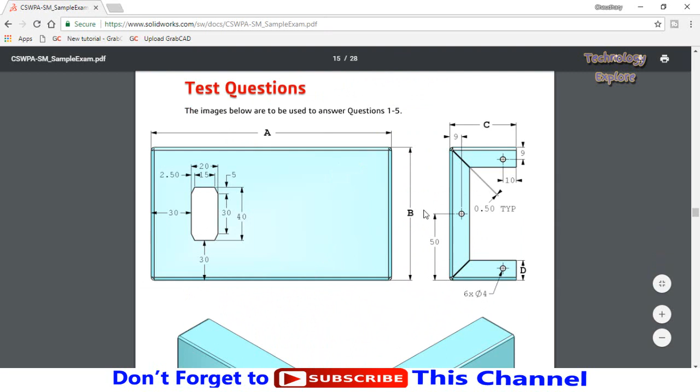Scroll down and directly jump to the test questions. This is the part and we have to draw this part or design this part in SolidWorks by using sheet metal features. As you can see here, A, B, C and D are the dimensions which are given to us as equations.

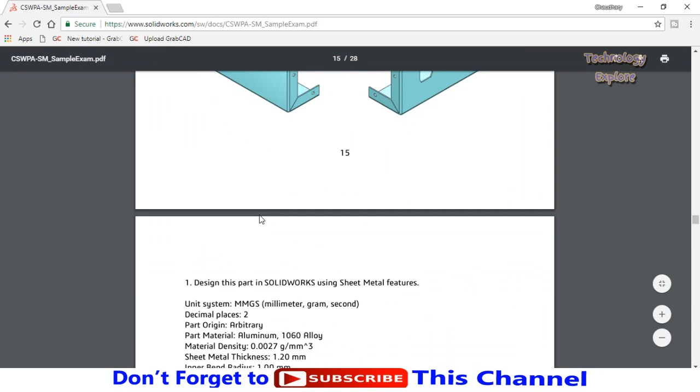Now let's start. Open SolidWorks. First of all, we have to add these equations A, B, C, D in SolidWorks. Go to Tools, then select Equations. Make sure this box, automatically rebuild, is checked. Then click on this box and type A, press enter button.

Now type the value of A equation, 180 millimeter, press enter button. Then click on this box and type B, press enter, and define the value 100 millimeter, press enter button. Similarly, type the values of C and D, 50 millimeter, and D 15 millimeter. Press enter.

Then press OK button. Now we have to start the part. So sketch on front plane, then draw a rectangle and start it from origin. Now define it, define this length.

We have to link this dimension with A. For that you must type is equal to sign and then press A button. Now link it with A, press OK. So as you can see here, we have the equation sign in our dimension.

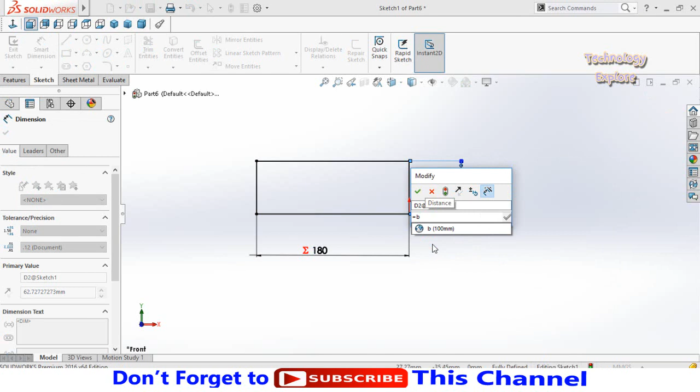Then define this dimension and link it with B, and press OK button.

Now go to sheet metal tab and select base flange tab, then type here 1.2 millimeter sheet metal thickness as given in the conditions. Press OK button.

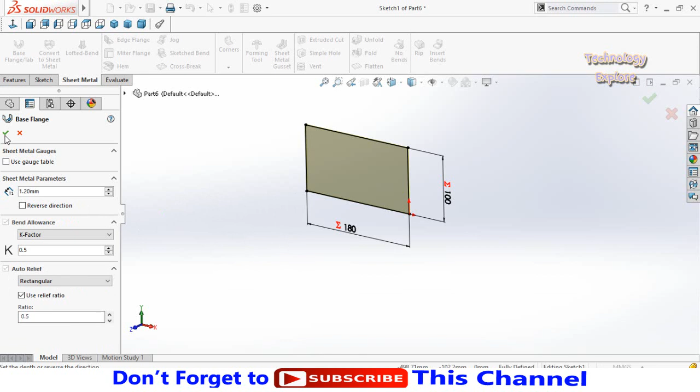Next step is to click on edge flange command here, then select this edge in this direction. Also select this edge. Now we have to edit these dimensions according to our conditions.

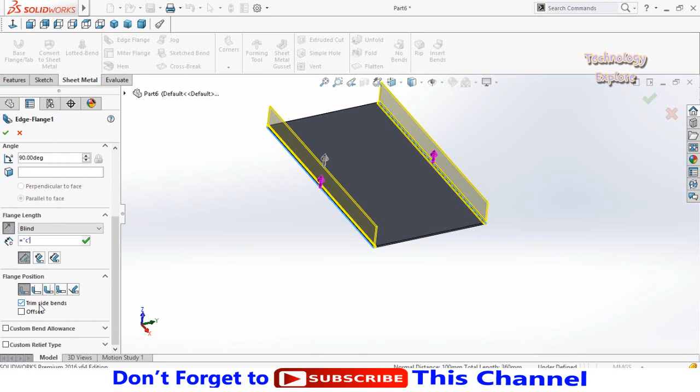Uncheck this box. We had inner bend radius 1 millimeter. Scroll down, then link this dimension with C. Press is equal to sign and then type C, link it with C, and make sure these settings are according to the conditions. Then check this box, trim side bends, and press OK button.

Now again select edge flange command and select this edge in this direction. Also select this edge, and from here select these three edges.

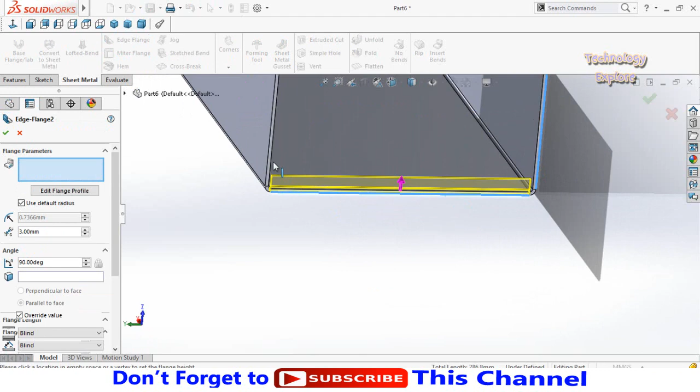Now edit these dimensions according to conditions. Inner bend radius is 1 millimeter. This gap distance is 0.5 millimeter. Scroll down and link this dimension with D. Press OK button.

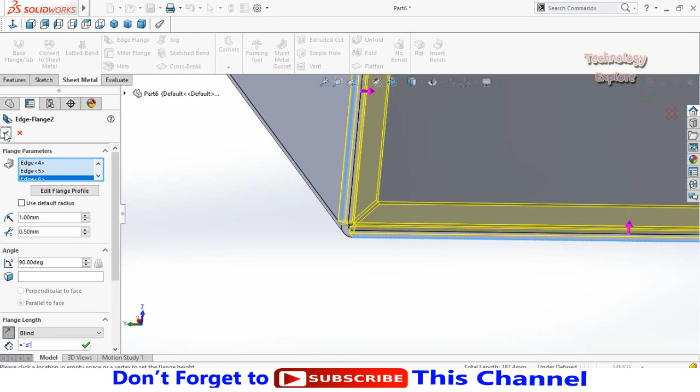Now we have to create holes on this face, and as you can see in the test exam we had written 6 times diameter 4. So total holes are 6, 3 on this face and 3 on this face.

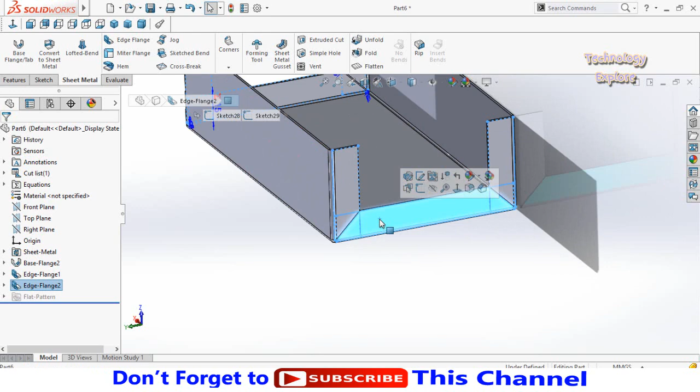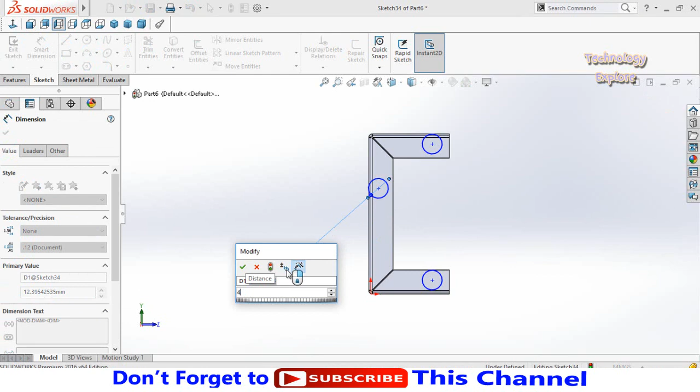So click on this face and sketch on it. Make normal to, then draw 3 circles. Press escape button. Then select all these 3 circles and make them equal. Now define the diameter of the circle, 4 millimeter. Now press escape.

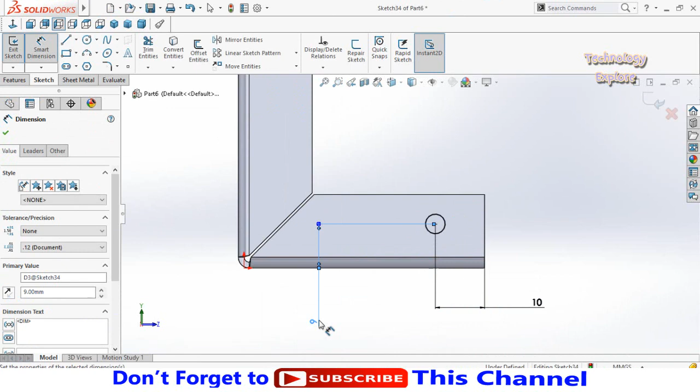Then press and hold control key and select this center point and this center point. Release the control key and from here make vertical relation. Now define distance from this line to the circle, 10 millimeter. Also define this distance, 9 millimeter. Then define this distance, so link it with this distance as it is also 9 millimeter.

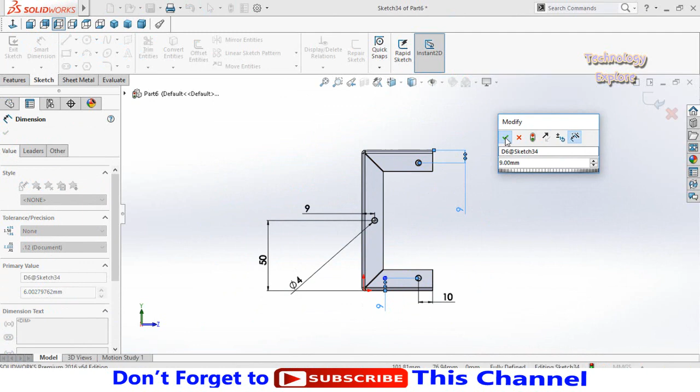Now define this distance, 50 millimeter. So at the end link it with this dimension, it is also 9 millimeter. Now as you can see, our sketch is fully defined.

Go to Features tab and apply Extruded Cut command. Double click on this face and press OK button.

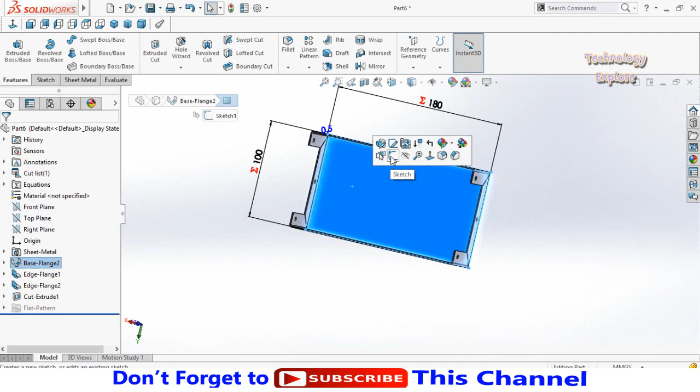So next step is that we have to create a hole on this face. Click on this face and sketch on it. Make normal to. Draw a rectangle. Now define it. This length is 40 millimeter. This length is 20 millimeter.

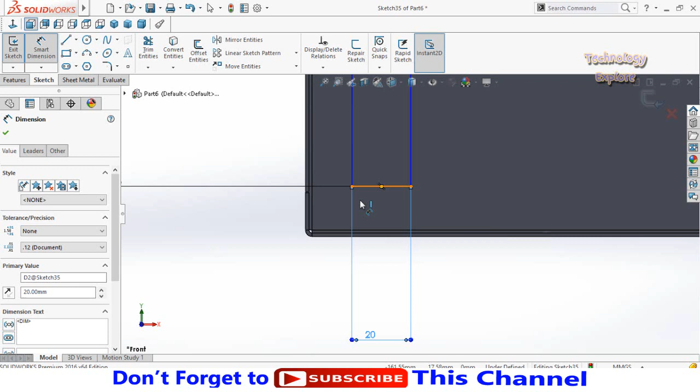Distance from this line up to this line is 30 millimeter, and this distance is also 30 millimeter.

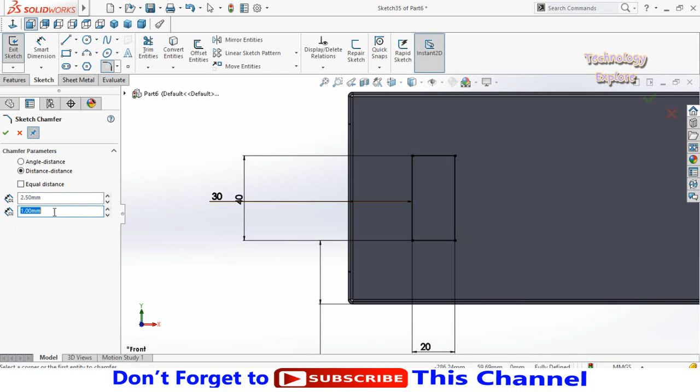Now click on this arrow in front of sketch fillet and from here select sketch chamfer. Then uncheck this box, equal distance, and then type here 2.5 millimeter and here 5 millimeter. Then select all these corners one by one.

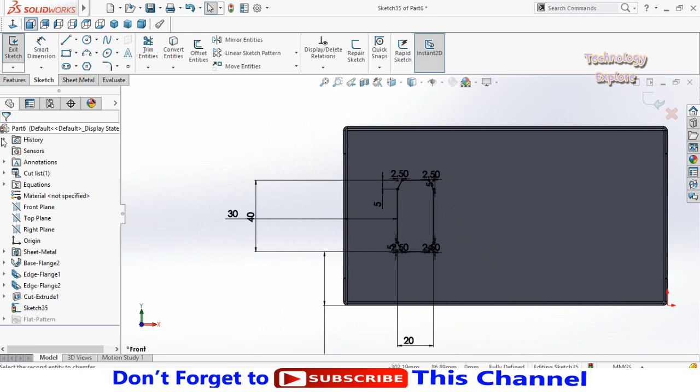So from here we have to edit this corner. Type here 5 and enter. Then type here 2.5 millimeter and press enter button. Press OK button. Now go to Features tab again and select Extruded Cut command. Select this face or double click on it. Press OK button.

So next step is that we have to apply the material according to the conditions. For that, right click on material here and then edit material. From here expand aluminum alloys and then select 1060 alloy and apply, then close.

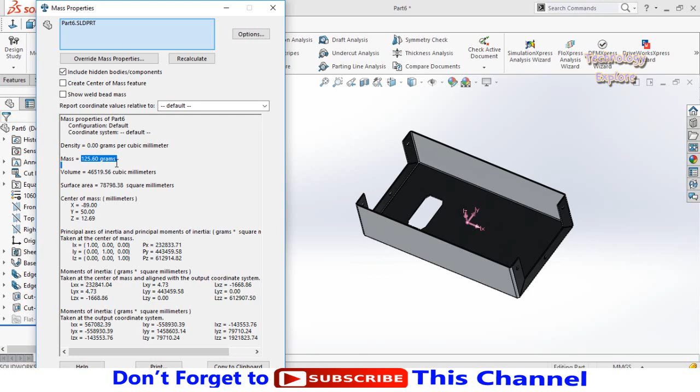Now we are able to answer question 1, which is to measure the mass of the part. For that, click on the evaluate tab here and then select mass properties. So this is the mass of this part, and as you can see, this answer is correct according to the answer key. Then close this dialog and jump to the next question.

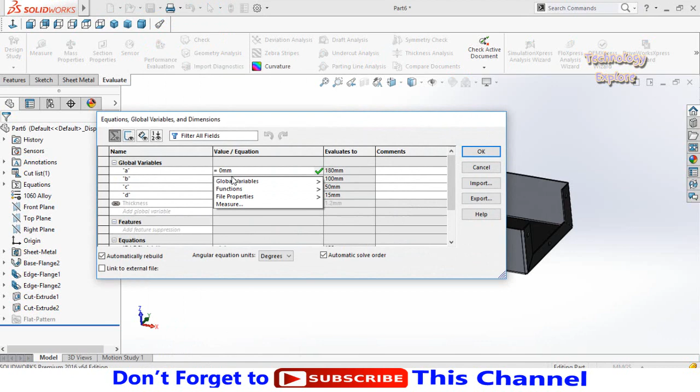So here we have to apply the conditions, or edit the A, B, C and D equations. For that, go to tools and from here select equations. Now edit these dimensions according to the next conditions. A is 200 millimeter, as you can see here.

I had checked this box for automatic rebuild, so you can see we had rebuilt our part automatically. Then B is 110, C is 40, and D is 18 millimeter. Press OK button.

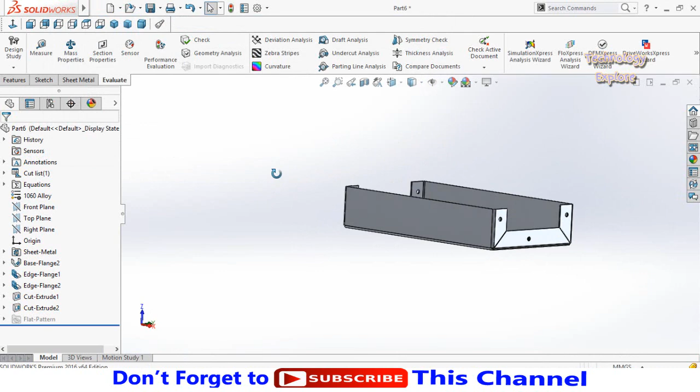So the question is again to measure the mass of this part. Go to evaluate tab and select mass properties. So again we had a correct answer according to the answer key. Close this dialog and then go to next question.

So here again we have to edit A, B, C and D equations, and also apply a K factor of 0.40. Right click on sheet metal here and then edit feature. Edit the K factor to 0.40 and press OK button.

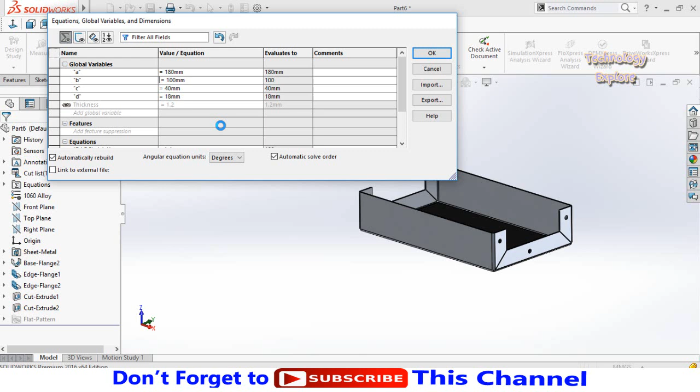Then go to tools and from tools select equations. Now edit these equations according to this design: 180, 100, 50 and 15. Press OK button.

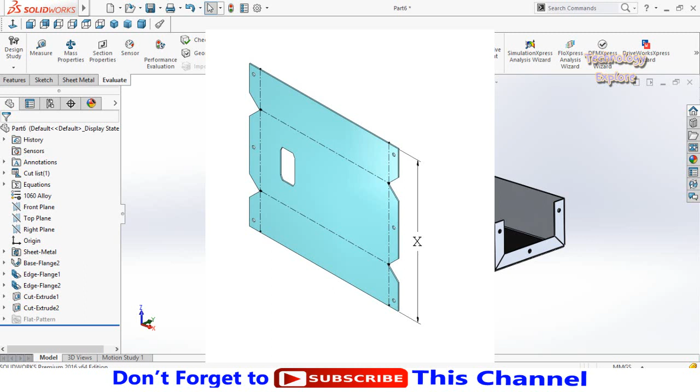So the question is that we have to measure the indicated distance x as seen in image. For that, first of all, we have to flatten this part. Go to sheet metal tab and from here flatten it. Now go to sketch tab and from here select smart dimensions. Check this option, reference dimension, and then select this line. So this answer is also correct according to the answer key.

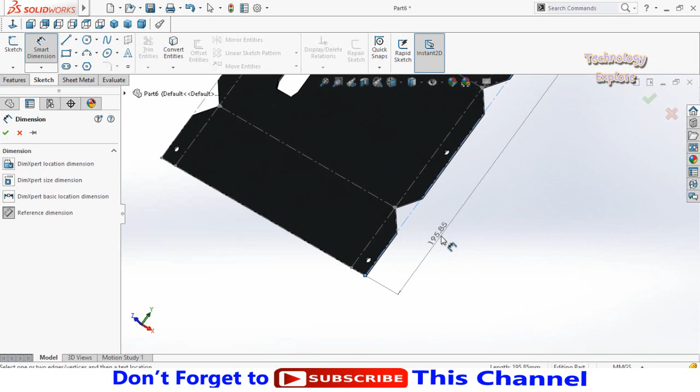Now press escape button and then in the sheet metal tab press this button. Now next question.

Again we have to apply a K factor of 0.32. So right click on the sheet metal and then edit it. Type here 0.32 K factor and press OK button.

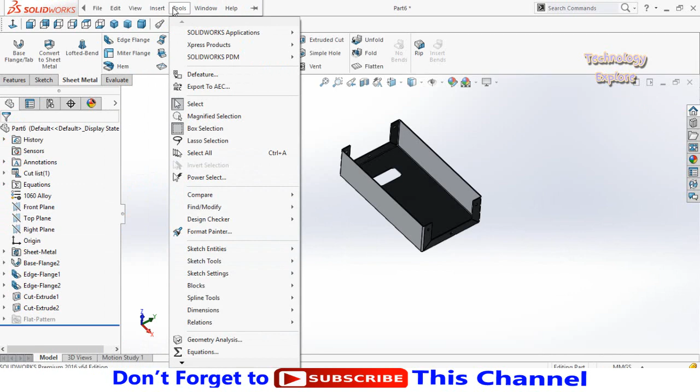Then edit the equations from tools. Type here 200, and for B it is 110 millimeter. For C it is 40 millimeter, and 18 millimeter is the value of D.

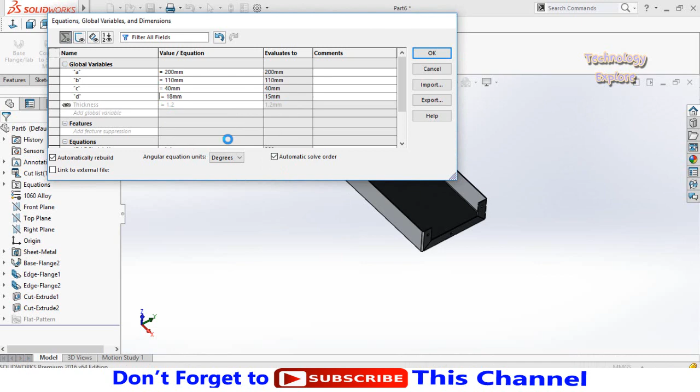Press OK button. So again we have to measure the indicated distance x. Go to sheet metal and from here flatten it. Again from sketch tab select smart dimensions and then select this line. So this answer is also correct.

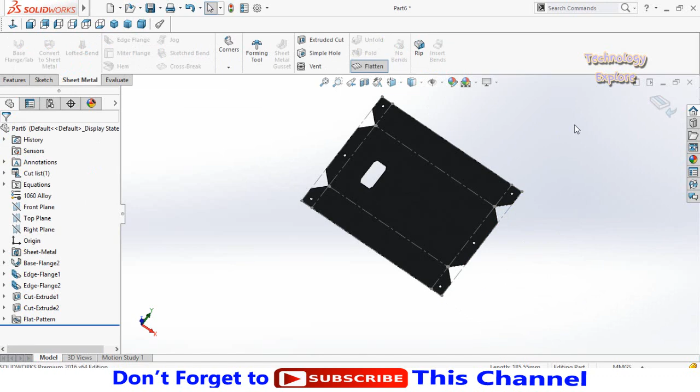Now jump to question 5. Press escape button and then in the sheet metal exit from flatten mode. So here we have to apply the same parameters as given in question 4. So in this question we have to apply the same conditions as mentioned in question number 4.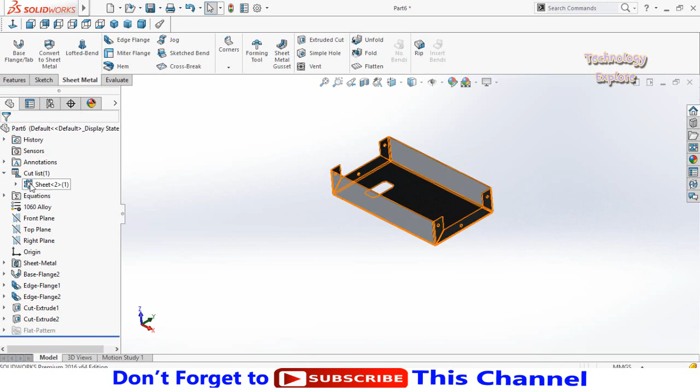So now we have to measure the bounding box area. How to measure the bounding box area? If you can see here, expand the cut list, and from here right click on sheet. Then select properties. So this is bounding box length, this is width, this is thickness, sheet metal thickness, and this is bounding box area, and this is bounding box area blank. But we have to measure the bounding box area only, so this is the bounding box area. And this answer is also correct according to the answer key.

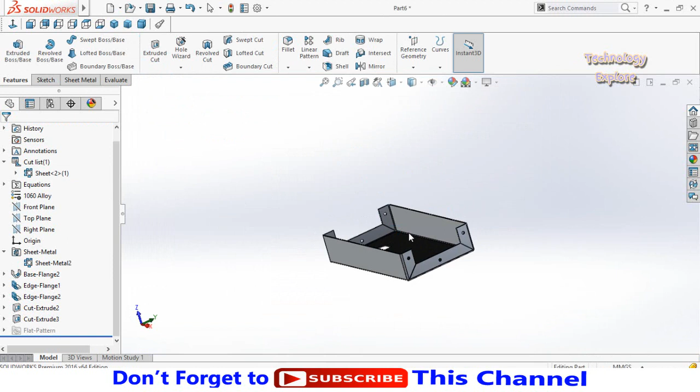Now let's solve question number 6. Press OK button. First of all we have a condition to remove these holes. For that, right click on cut extrude and delete it. Then delete the sketch and press yes.

Then we have to create a hem on both of these edges. For that, go to sheet metal tab and from here select hem. Then select this edge and select this edge. Reverse the direction of hem by clicking on this button. Then this is the total length of hem, which is 10 millimeter, and this is the hem gap, which is 1 millimeter. Scroll down.

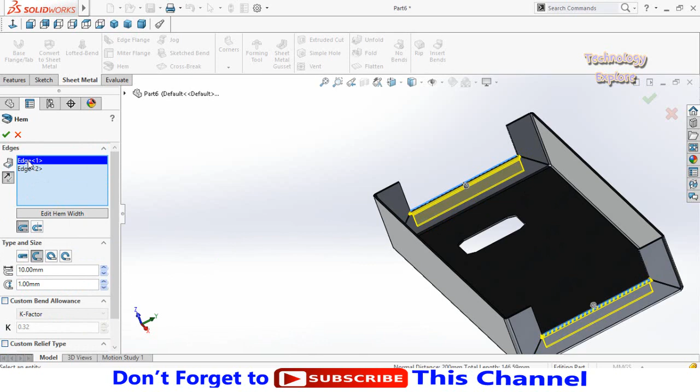Now select this edge 1 and then edit hem width. Click and drag this point, also click and drag this point. Now define the distance as 2 millimeter. Also define this distance, and it is 2 millimeter. Then finish this process.

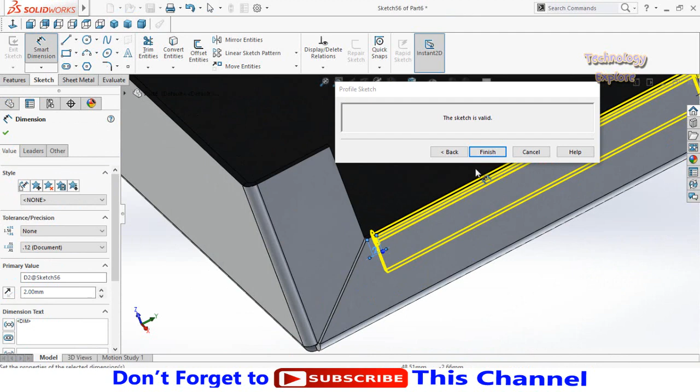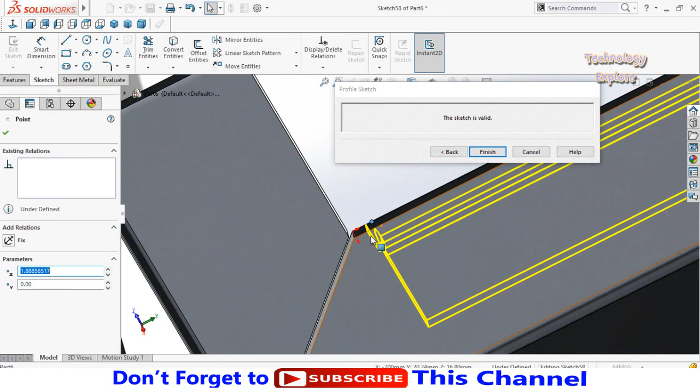Now we have to edit this side of hem. So again click on hem and edit it. Then select edge 2 and edit hem width. Click and drag this point, also click and drag this point. Now define it: distance from this point up to this point is 2 millimeter, and this distance is also 2 millimeter. Now finish it.

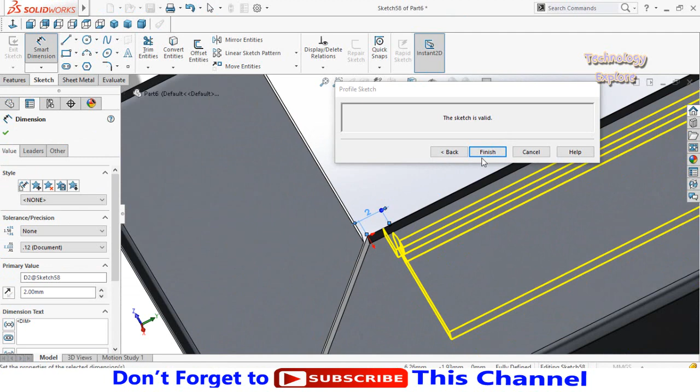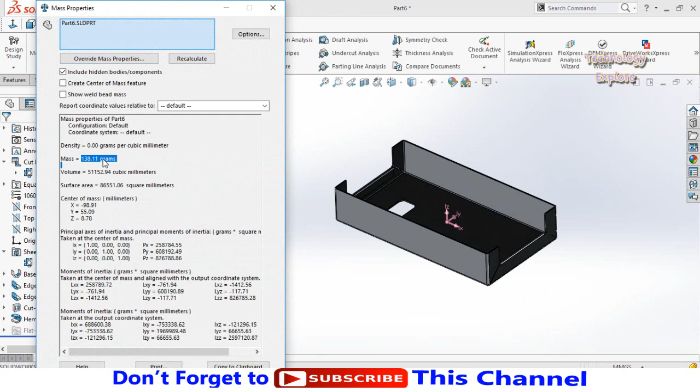So finally we are able to answer question number 6, and it is to measure the mass of this part. For that, go to evaluate tab and from here select mass properties. So this is the mass of this part, and we have a tolerance of 0.50 grams. So the answer is also correct, and I hope you had enjoyed and learned from this video.